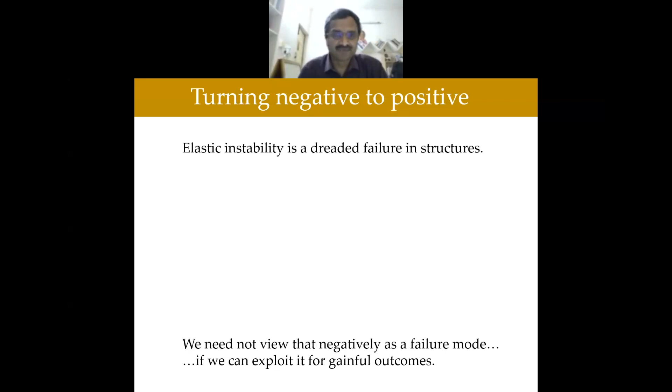Since it's evening, there's nothing wrong in remembering somebody like Charles Dickens, who said suffering has been stronger than all other teaching and has taught me to understand what your heart used to be. This is the quotation that is often used: I have been bent and broken, but I hope into a better shape. So that better shape is what I'm taking here.

In fact, we work on compliant mechanisms where Professor Steve Vogel, a very distinguished biologist who wrote about mechanical things—I'm sure many of you have read his books and papers—had his article written in 1995, just when I finished my PhD, called Better Bent Than Broken. That had a profound effect on how I started to look at mechanical design, where things can bend but do not break, and they bend into a shape that is actually useful. So its inspiration comes from Charles Dickens and Steve Vogel, and of course many other mechanical designers before me.

So buckling of columns is known to all of us. This is an instability. There's a little problem we always start with: just a rigid rod, not a flexible column, pivoted like an inverted pendulum, with a rotation spring of stiffness kappa. If you apply an axial load after a certain value, P critical, it will have a stable equilibrium that is off from theta equal to 0. One can derive the critical load very easily from looking at this equation and stability, and say that the critical load in this case will be kappa divided by L.

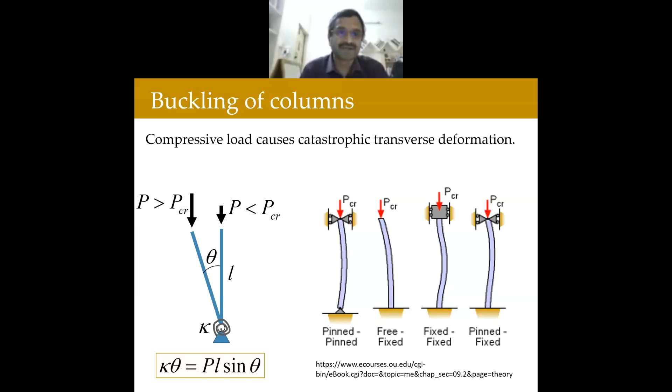That's a wonderful little problem to first look at instability. This is a very rich problem because we can illustrate the bifurcation. Theta equal to 0 will be the solution for a certain value of P critical, and then it bifurcates, and bifurcates, and bifurcates—it just goes on if you keep increasing the value of P. But we also learn that when you have a little bias right from the beginning, it will actually take a very nonlinear force-deflection path, P versus theta. So it's a very rich problem.

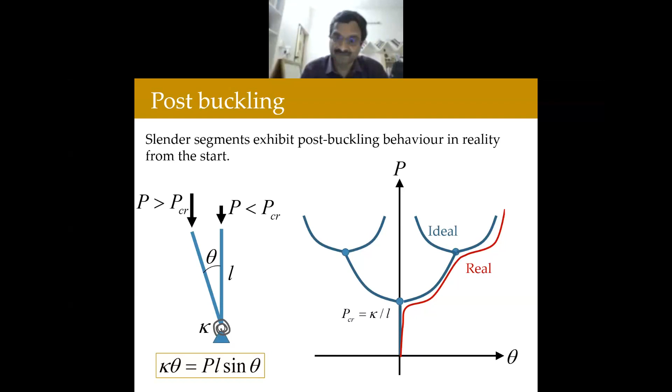Most of the time, we design structures to avoid this type of buckling. But today we are going to see how we can take advantage of this instability.

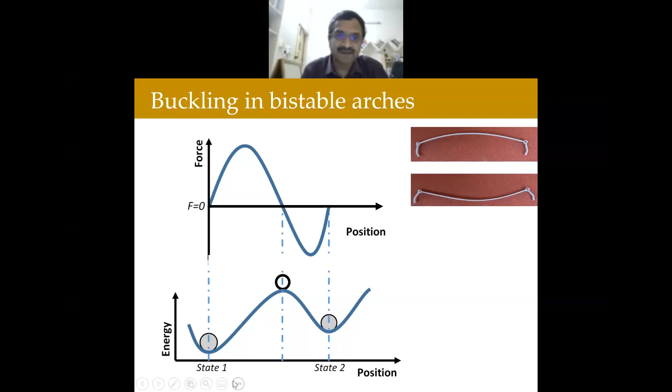Now the two stable states you can see for the pin-pinned shallow arch. And sometimes it can also snap through, that is, it won't be bistable, the force will never become negative, it will stay positive, but yet you get this nonlinear profile. The force goes to a maximum, comes down to a minimum, and then goes through, which we call snap through. And then, of course, bistability you already saw.

This can be thought of as a static response, force versus displacement, where you're holding it at different positions and asking what is the reaction force. That's what I have plotted. That region is negative stiffness, and that is actually the source of instability here. It just snaps to the other stable position.

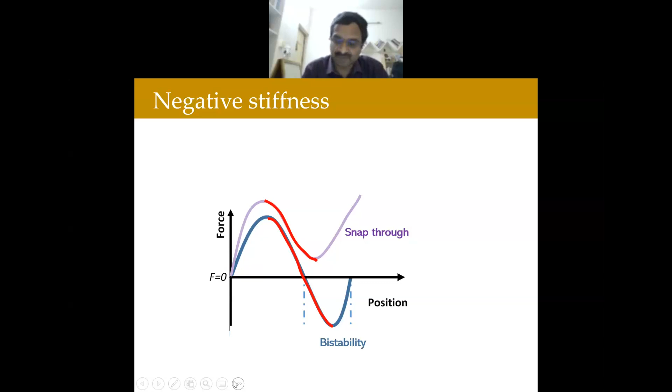But if you do it in a controlled way, you can actually get this negative stiffness zone, and that can be exploited, as we will see today. Some of you might have seen it earlier also. How do you use this, both this bistability as well as snap through?

We have been working on this for over a decade. Actually, I didn't realize that we were working on it for over a decade. And a number of applications have come through.

Some of them are shown here: a micromachined bistable switch, a circuit breaker that every house has, a therapeutic footwear, a chair for the elderly and people who suffer from arthritis and others, a valveless pump, a mechanical logic gate processor which is special to IIST, I'll come to that, and that is your institution. Also a compliant gripper that is kind of universal or versatile, and something that we do with biomechanics of cells.

But I'm not going to talk about that one. Whatever I put in black color, I'll talk about that. There's one in blue color, passive vibration isolator, that's actually not our work, it's a company called Minus K. Minus K itself tells you that K is stiffness, minus is negative stiffness.

A lot of applications can be thought of, and if I talk in detail about each of them, it'll be a talk in itself. So I'm going to give you an overview of this and how we are exploiting negative stiffness in all of these applications.

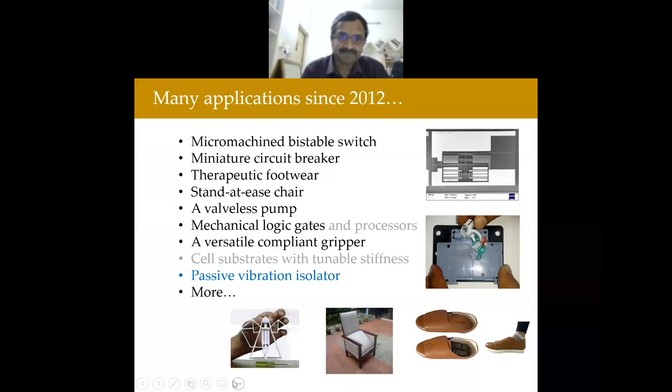So it all started with this click-clack tin lid. In fact, I have it here with me. I got it in 2002, actually 20 years ago, at a conference where they give some goodies with some candy in it. Somehow I liked the sound of it and the way it works. So I kept it with me, and then 10 years later I found a use all of a sudden, and then another 10 years we have worked on it. So the way it works, it's just a rusty metal tin.

If you press on it at the top, the concave surface, the convex surface becomes concave, and it opens this lid. They go outwards radially, and then when you press on those from the side, it actually flaps back, and then it makes the sound click, click, click, clack.

So it's bistable, in fact bimodal, that is, you can do it in two different ways, where there are two pathways to switch between two stable positions. It was intriguing for us, and then we tried to model it. So if you look at the same force versus displacement curve I talked about, if a shell is convex up like this, that's where you are.

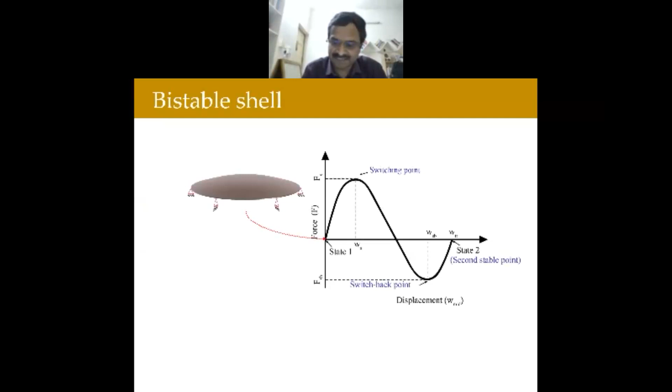At maximum, if you press on it from zero, you go to the maximum, then it switches to negative stiffness and comes to the other stable position where there is no force again. It's force free, and goes to the other state.

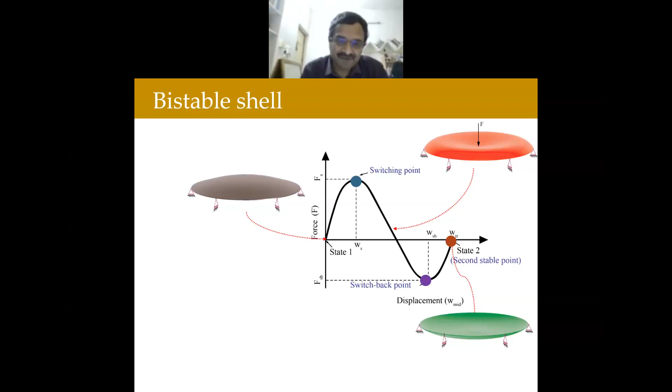So the shell is what we try to model. It was quite interesting when we tried to model it. I was playing with this rusty thing for a long time, and a parent of one of my students found one elsewhere and gave me a nice looking tin. There are people who make these just to give as gifts - I got one at a conference 20 years ago.

So we took this shell and were analyzing it. There were some interesting things. Then we thought we really want to analyze it well, analytically. Instead of doing it computationally, we took a section of it, and that became the shallow arch I'm talking about. It's pinned - that condition is important for this to work, because it actually rotates around the periphery of the shell. So when we took a section of it, it became a shallow arch.

So I'm showing the first equilibrium state, which is stress-free, just pinned at two ends. When we apply the force, it goes to the other state - that's a second equilibrium, no force, but it's stressed. That's also a stable equilibrium, as you saw. If I were to rotate that half of it about the pin joint, the shape will be different, as shown here, because the shape is deformed and has stress in it.

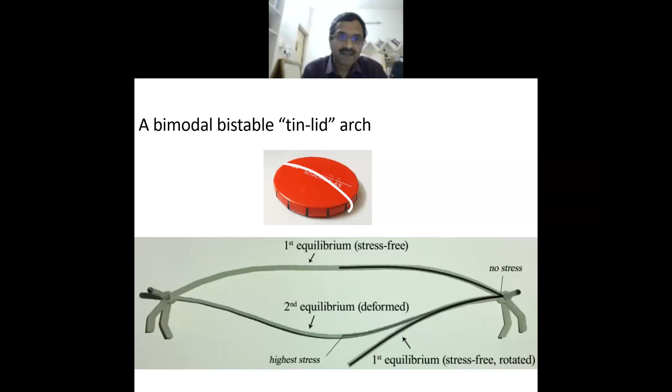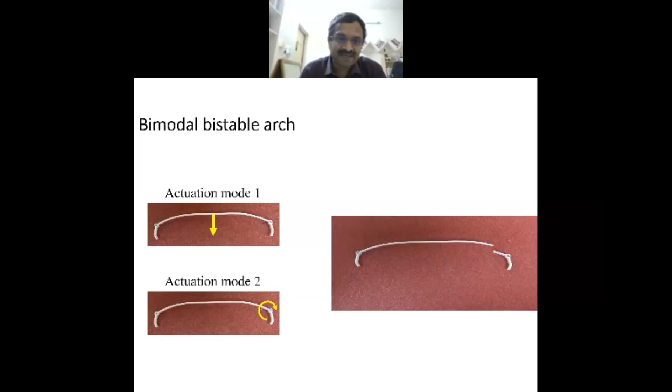So here I'm again showing that actuation. There are two ways of actuating this shallow arch. One is at the center, which switches it from state 1 to state 2. The second is applying torque at the pin joints to switch it from state 2 to state 1. There are two actuation modes - that's interesting - and you can see how we actually switch here in this video.

I hope the videos are playing well. So here we are actually actuating by applying torque rather than applying force. There are actually umpteen ways you can do it - I'm just talking about two ways of doing it.

And here also, if you start applying the torque, at some point your thumb that is holding it will lose contact - it just goes by itself. It happens very quickly, which is why I have to do high-speed video and slow it down with markers to show what's happening.

If you look at this from the energy viewpoint, we can look at the potential energy I showed earlier. The moment we apply some force, you add to the strain energy also the work potential, and the energy landscape changes. That's what I'm showing here.

Potential energy without the force work is just strain energy. When you apply port 1, applying the force at the center, it has one kind of curve - the dotted line here. When you apply the torque at the hinges, it's a dashed line. As we do this, it switches and the energy landscape changes.

We can see it - I will show some simulations later with time showing how they would look. This click-clack tin-lid actually takes a very tortuous path, as I'm showing: A to C, then C to B, and B to D, and D to A. That's interesting, and one can play with this in many other ways and use it in different applications.

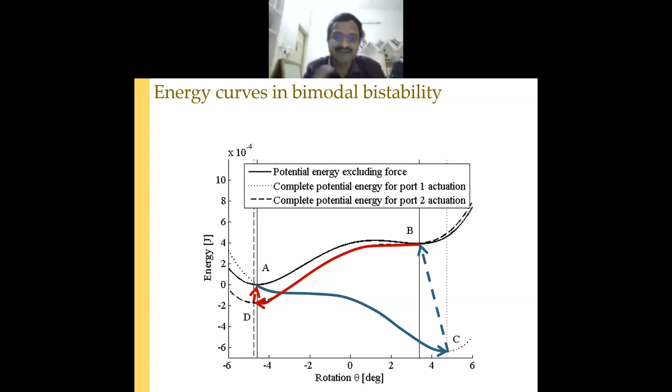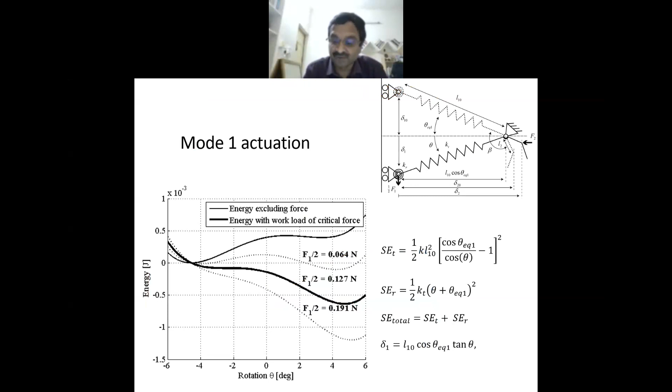We first modeled it using just a rotation spring and translation spring, trying to understand it with simple algebra - how we can get the critical forces required to switch it from state 1 to state 2, and also from state 2 to state 1. So it's all simple analytical algebra, I think, just to understand it.

This video will show you how the energy landscape changes as you watch force versus displacement, and how the energy curve changes with time as I'm applying the force - that force changing with the displacement. There's a midpoint displacement of the arch, U mid, and you can see how it goes and settles at the other stable state.

While coming back, because it is stressed, it requires much less force compared to the force required to switch it from state 1 to state 2. State 2 to state 1 needs very little force. The energy curve also has a local minima as the ball is moving, but that is very little compared to the previous one - that's a slope where the force is much less. You can switch with much less force from state 2 to state 1. So it was interesting.

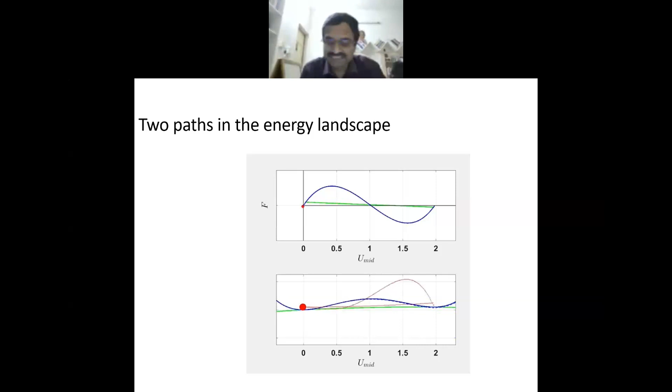It was a curiosity exercise about this click-clack lid. But then we thought, can we use it somewhere? And that's when we started on this project of making an assistive chair.

So if you imagine that arch I showed you, when the person sits on it, the convex-up arch can become concave-down, just like we saw. Then if the person wants to rise from the chair, they can press on the armrest. That is like applying torque at the joints. Then it will go to the other state, giving a push for the person to get out of the chair.

Of course, because the other state is also stable, while you are sitting in it, you don't feel any push. It will be comfortable like a regular chair. When you press on the armrest, it will propel you up.

Of course, we don't want the person to go like a projectile because this is an unstable phenomenon. If it just goes like that, it will be a problem. So we started combining this with static balancing so that it will be slow and gradual, so the person using this chair wouldn't feel sudden motion from sit to stand and stand to sit, both ways.

So we had this finite element analysis just to see how we can use this two-port actuation: while sitting, it's stable, so you are comfortable, it's not pushing you. When you want to get up, you press something, give a trigger, and that pushes you. But then static balancing combined could do this.

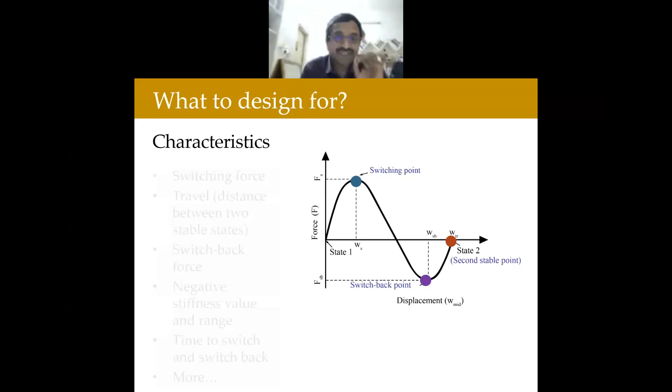So when you started thinking about it, the design came up. How do you design these bistable arches for this application? We looked at this force-displacement curve and thought, okay, there are switching points - a first switching point and switchback point we need to have. Then the switching forces, for shifting from state 1 to state 2 and then back, and how much travel there will be. And what is the range of displacement where you have negative stiffness, because that we really need to tune.

Also, time to switch from state 1 to state 2 and state 2 to state 1. All of this we wanted analytically, because doing it computationally is an unstable phenomenon. If you use finite element analysis for the shells or arches, it takes considerable time, and any design change you make will be problematic. So we started looking at it analytically.

So I'll just go over the analytical modeling quickly. When you start looking at it, you trace it back to the real stalwarts - in this case, Professor Y.C. Fung, the father figure of the biomechanics field. It was probably his doctoral work, a wonderful piece of work at Caltech, where he looked at these shallow arches and how to model them.

At the same time, at the Office of Naval Research, other people - Hoff and Bruce - had also done similar work. In fact, they acknowledged that, just before they published, Professor Fung and Kaplan had already done this too. So it's a coincidence, 1951 is when they did this work, and that's what people still use today. Their technique was very elegant and very simple.

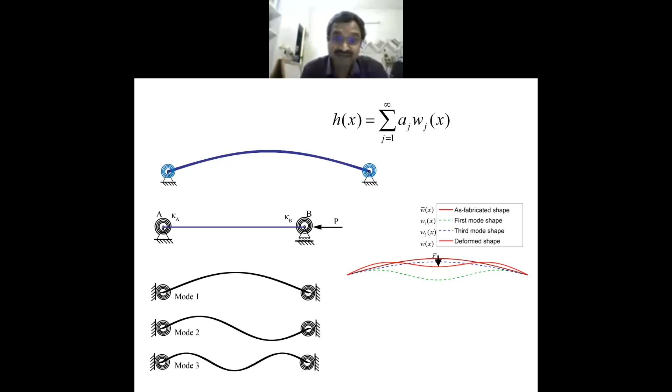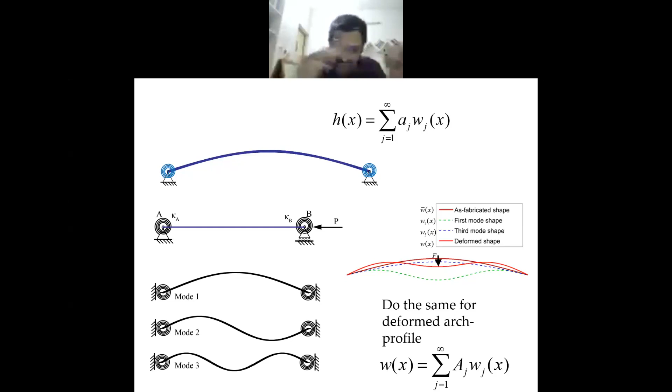And they did the same thing for the displacement, where the arch deforms - deformation of that arch, W of x, they expressed as small aj, from 1 to infinity. You can take as many modes as you want to model the arch itself. The displacement or deformation of this arch in the transverse direction will be capital AJ.

That's what they took, and it was very clever, because depending on your need, you can take the first 2 modes, first 3 modes, 1 mode, 2 modes, whatever. It turned a continuous problem into a discrete one - that always happens in the modal method we all know about. The other thing is that all these mode shapes can be worked out easily for any boundary condition, pinned, fixed, or whatever. Once you have these mode shapes, you'll know for a given profile what is a small a.

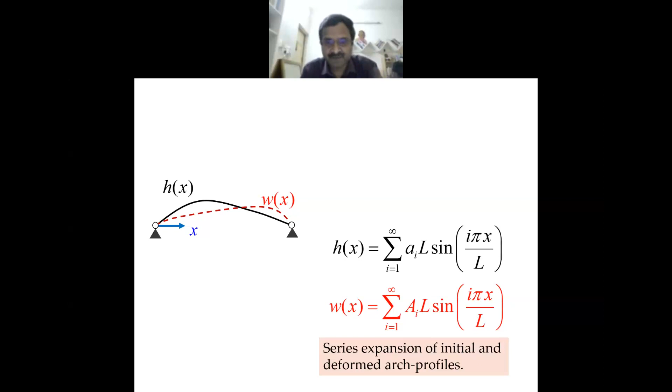That is small a1, a2, a3, whatever you have, you can get the shape. And you can make the higher ones zero also, depending on what shape you want to have for the arch. And then, of course, deformation you have to compute, which is W of x.

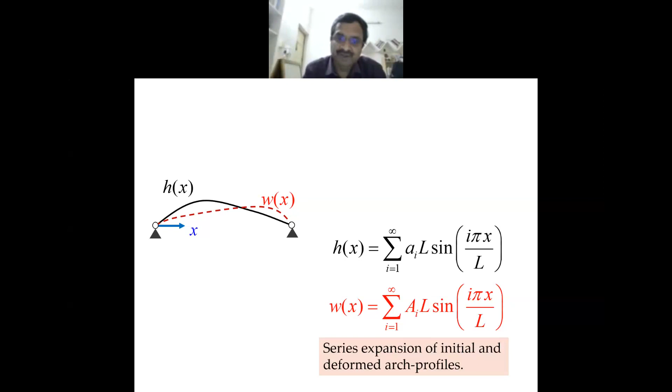And here is where the genius of that paper, those two papers, came through. Instead of solving this differential equation, which is quite difficult to solve analytically, they use the energy method. They minimize the potential energy by writing the bending energy and also axial compression energy. Bending energy is easy because we learn it at the undergraduate level. Axial compression energy is more difficult, but they had a very clever trick.

All they did was they took the axial stiffness and the change in length of this arch, because as the arch deforms when you apply the force, the arc length of the arch will change. They just took that original length and the final length, the change in length, multiplied by stiffness, an average one.

It works wonderfully. It actually gives results that are very accurate compared with finite element analysis. And why it works, we still don't know, but it works wonderfully. And that's what they had done.

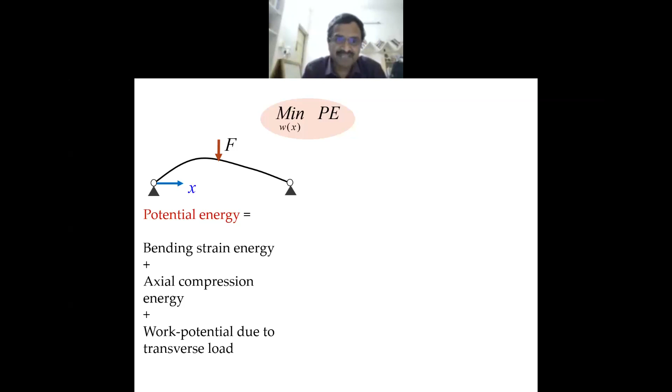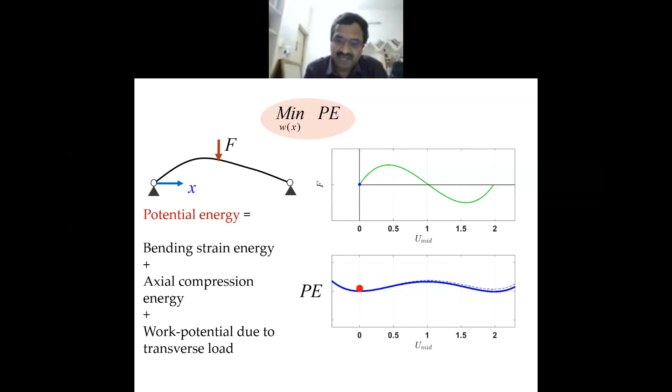And you take this potential energy approach, and now it becomes easy to do optimization. Basically, your W has capital A1, A2, A3, which are the mode weights of all these different buckling mode shapes, and you can determine them analytically very easily. And that's what we are doing here.

And then you have boundary conditions also added, and you can take the strain energy and the work potential, and the compression and bending as compression. You can write all these things in terms of W, but W is not a continuous function now because we have mode weights, right? So that becomes very easy.

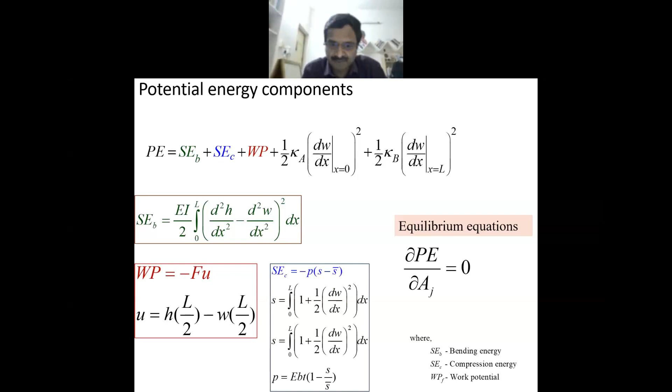You get equilibrium equations. It depends on how many modes you take for W, and you get so many equilibrium equations, which you can solve very easily. Everything can be done analytically.

And this is what my former student, Dr. Safwan Palathingal, did, who is now faculty at IIT Hyderabad. It is his work that I'm presenting mostly today. And he came up with this analytical way of computing the critical points.

What are the red spots here? So that we can get it very easily for different boundary conditions and different numbers of mode shapes that we consider. And it's all analytical.

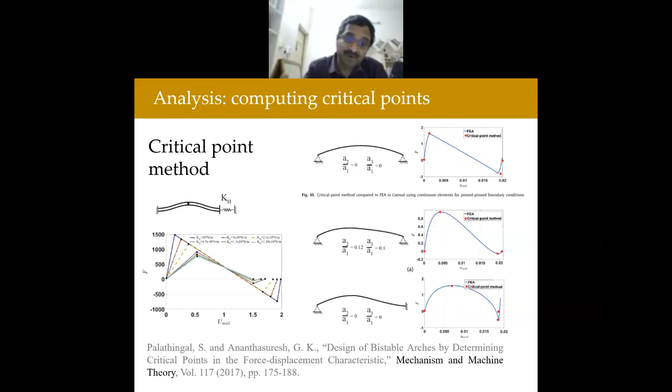We can derive formulae for these things. We don't do finite element analysis. We can change the boundary condition by putting a spring and so forth. So it's all analytical and quite straightforward, once you learn from the masters.

And then we also found out that instead of letting this arch deform in a plane like I showed, if you let it go spatially, spatial pathways, you also introduce twisting, because we saw that in reality the force required for the spatial pathway, the switching force, is less than that of the planar pathway. So what you see, the planar deformation, the green curve, has a higher switching force than the spatial pathway.

In reality, when you have a structure, it always takes the path of least resistance, right? So it actually deforms also, like twists. It's interesting, so here we could also include the twisting energy.

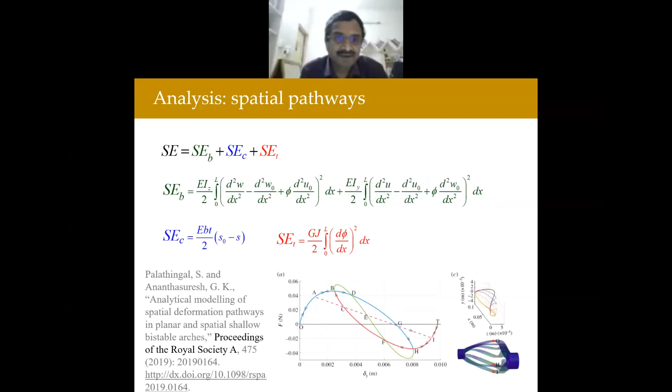Interestingly, this analysis was done by Saint Venant and Mitchell. It was in the Theory of Elasticity by Love, which is a classical treatise on elasticity. They had not included the twisting energy. We put that term in — Safwan added that term to the strain energy. They were able to do the spatial buckling also, analytically.

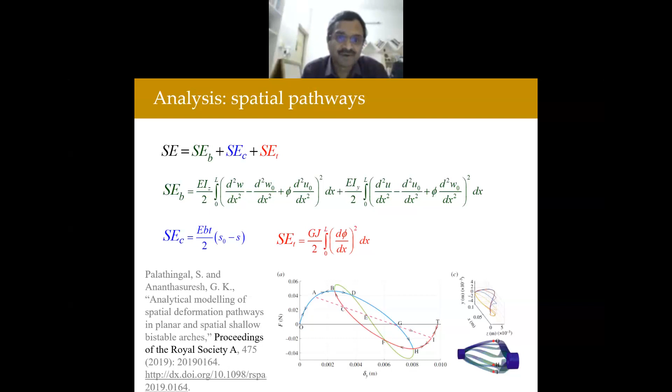We started becoming more and more courageous to look at these things. Then we started looking at synthesis — how do you come back? That is, if you want certain bistable behavior, let's say if you have that h of x, which is the undeformed arch, and the deformed arch is h plus w, where w is the deformation, then you have two stable states. How do you relate them analytically?

It was possible because of the method I just described. So if we are given this small aj's, however many you have to define your shape, from those you can actually get capital Aj's and go back and forth. It was all done analytically.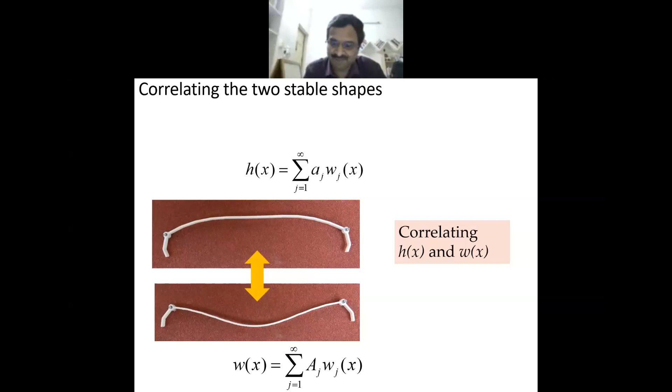So those are the equations I'm showing — a lot of algebra, I'm skipping all of that. So if you are given the stress-free state, that is the ai's, many of them can be zero. You may have only one or two or three, a5, a7, whichever, to our need and taste. And then it was reduced to a single nonlinear equation in A1.

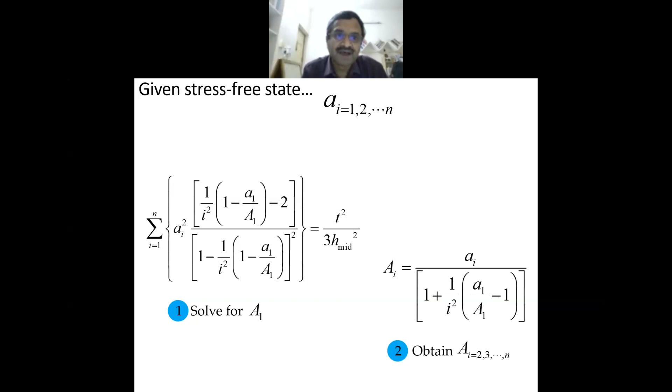Capital A1 is the deformed shape, and once you have that, everything else we calculate analytically using simple formulae that Safwan was able to obtain. Also, the other way, if we are given the stressed state, you can get the stress-free state. That is basically for design—these formulae become very handy, so you can actually design the undeformed state of the arch for a desired deformed state. That's what you want, and you can get that using this formula.

So we started doing all kinds of shapes. You could specify—since it's analytical and very easy, only one nonlinear equation in one variable—we could do that very easily.

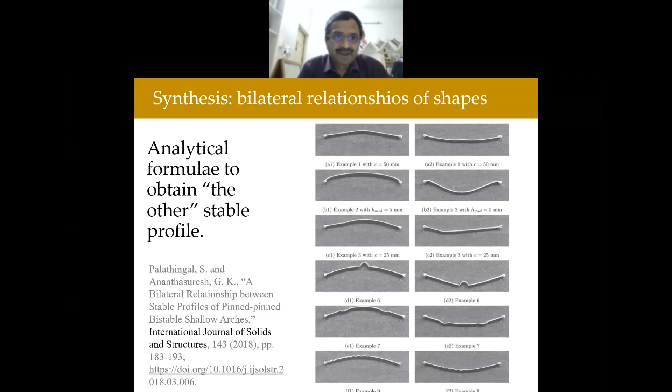So with that analytical design for different boundary conditions, for example, if you want to make a valve—no, not a valveless pump I'm talking about, just a valve—that is a shape that you want in the stressed state, the other stable state, not the one they are making. So how do you get the first one? We could get it from this analytical formula.

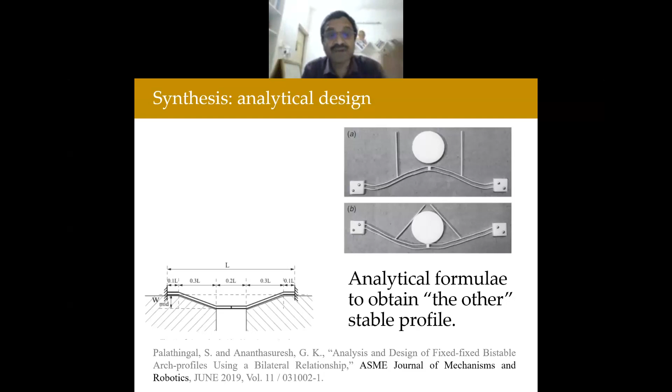The red one that I'm showing—if you apply the force, it actually becomes almost like this, which is shown here. If you put two arms like that, you can also grasp something. So by looking at these, we started getting a lot of ideas for applications.

I'm looking at the clock also, so I'm going to show a lot of applications now so that we can end the talk. I'm going to go fast.

Now that I've described the concept and the analysis and synthesis equations—micromachined switches. This was funded by ISRO, with a number of students, including Giridhar, a scientist at ISRO. This is the bistable switch.

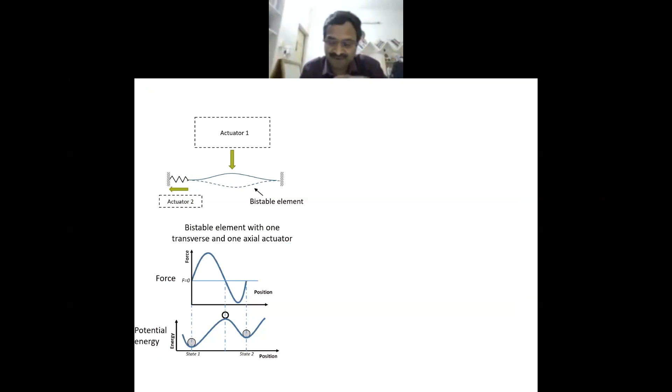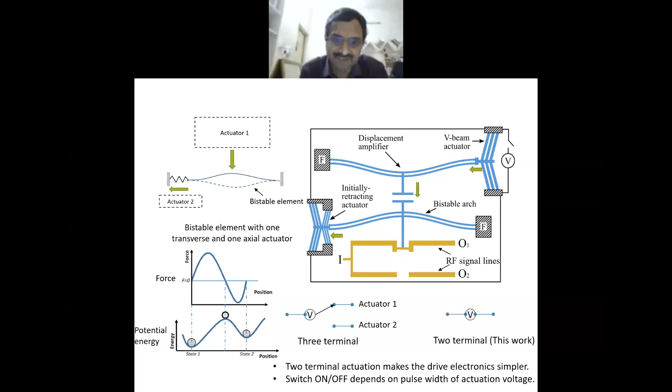We made that switch using this negative stiffness and these arches, several of them. I'll illustrate the principle of how this works with a little first graphic animation, and then I'll show the real device also. So now the current is going from I to O1, and then when I apply this electrothermal actuator, which is shown where I'm applying voltage, it will switch.

I'm just showing the intermediate state. It will switch there to the other state. And then when I apply the same voltage at the same two terminals—now you see I don't need to apply the voltage continuously. I only need energy to switch from state 1 to state 2; in between, I don't have to. That's why these are electric switches—we all know the principle.

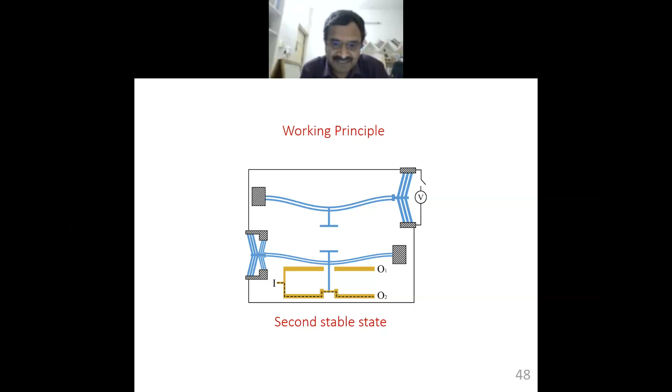In this particular case, to switch an antenna, they wanted a number of switches. They don't want to use energy all the time—just switching uses energy, that's why they were interested. We pursued this application, apply the voltage, and for this we had to design a special actuator at the other end so that it actually switches back. So that's how it is.

I'll show the video now. Video will start playing—you see, it's a micromachined version. The beams here are 5 microns wide, and a thermal actuator is on the left side as well as the right side. There's a particular reason why you need two actuators here, because we want to control the instability of it, since it's all negative stiffness in between. So we were able to make it, and it's a switch. My student Dhananjay put his imprint also, DJ, there.

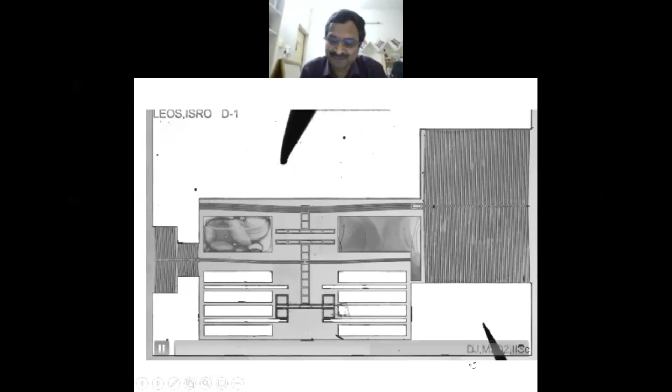So next, miniature circuit breakers. They're wonderful devices, but they have many parts. Every house has this now, MCBs as they are called, and they have a lot of parts. So when we were talking with Eaton Company, we said we can do it with fewer parts—actually 1 or 2 parts we promised them and did it. So that's how the MCB looks.

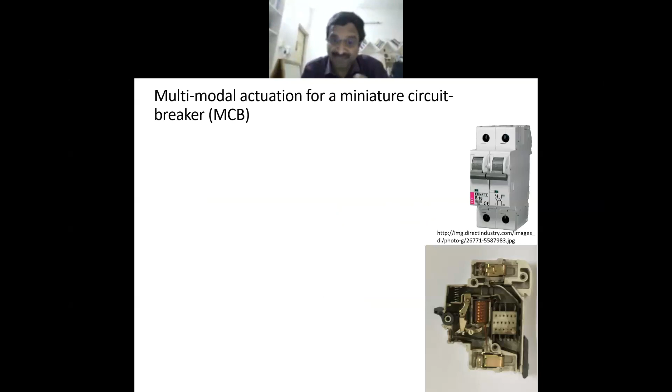It's a switch, but it has a lot of functionality—it's quite an interesting device. You can do manual closing and opening if you want. It can trip when there is a fault in the line, or if it gets too hot, it can also trip. Also, we should be able to relatch—whenever a trip happens, we know it becomes loose, so you have to push it back and bring it down. All of it is mechanical, right? It's a wonderful device, but a lot of parts, as you can see.

We started doing that with one part we had designed, but when you actually go to industry and give them, they say it's difficult to make, or they have to change lots of things. So we gave them 2 parts instead.

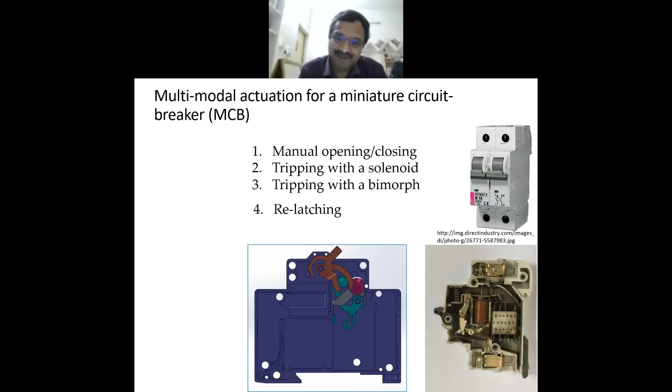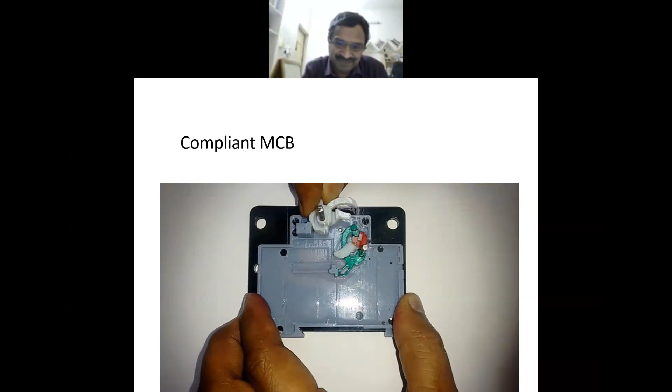So I'll show this device. It's a prototype, real size of this. We could get all those functionalities. You cannot see the negative stiffness here, it's hard, but with the details you would be able to see. And this is another model.

Instead of MCB, they had also MCCB, this is molded case circuit breaker, a little bit more. If you notice this video, after you do the actuation, I'll play it again. After actuation, it waits for a while and then the switch goes. It's like a delay, you can get delays in mechanical systems. This is one of those examples.

So here we made a one-piece design of a snap action device. I hope the video is playing for you. After you move the switch, which is what you're doing in MCB, it waits for a while and then holds all the energy and suddenly goes and snaps, so that it makes a very good electrical contact there. So that's how we achieved it, and this is a 3D view of that device.

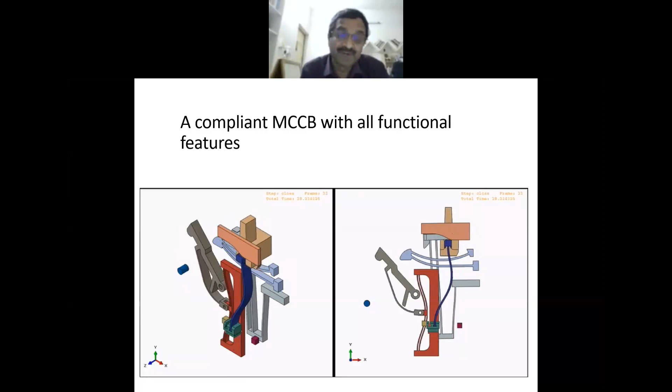We just put the MCCB switch. It's all barring 1 or 2 hinges there, everything else is compliant, and a lot of arches are there with these negative stiffness elements. There's a lot of detail, but I've already given you the idea of how we are doing analytical as well as synthetic modeling. Now, this is another application.

This is footwear. We were just talking with a podiatrist, and they were talking about offloading. They always work with some memory foam or other polymer material, which can be carved and shaped to suit the foot needs, where ulceration occurs or not. But then the doctor told us that after they use it for a few months, sometimes even few days, their gait changes and some other portion that is not offloaded becomes vulnerable.

This was done with support from Rajiv Gandhi University Health Sciences, with Dr. Pawan Velahalli and my students Priyabrat Maharana and Jyoti Panavane. Normally you see static offloading, as it's called, where you basically carve out the foam-like material, but that only offloads that region for that time. When you change it, it will be a problem.

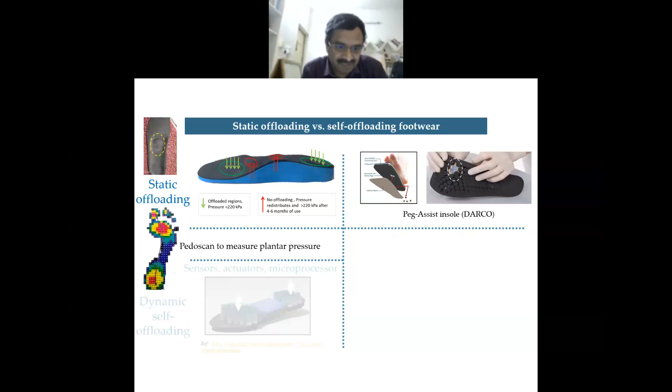Somebody came up with an electromechanical device where there are little pegs that move up and down. There are sensors, and they go down and offload, like I'm showing in the lower left half of the screen now, the dynamic offloading. We thought, can we not do that with entirely mechanical means using these arches, as I'm showing here? And the next video will also illustrate the thing.

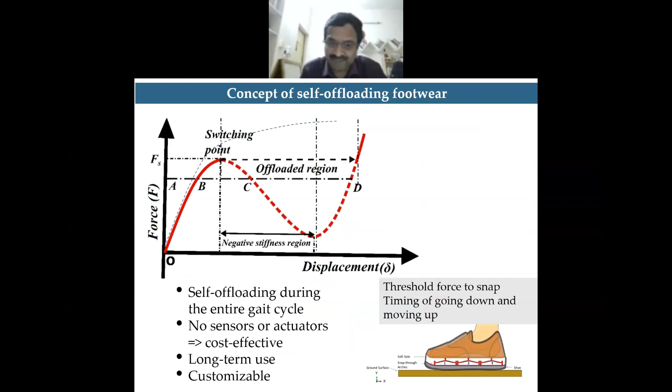Again, we work with these arches, designed in an array of them, as you would see in this video. I hope again the video is playing for you. There are these snap through arches now, they just go down and offload at a pre-threshold, 220 kilopascal.

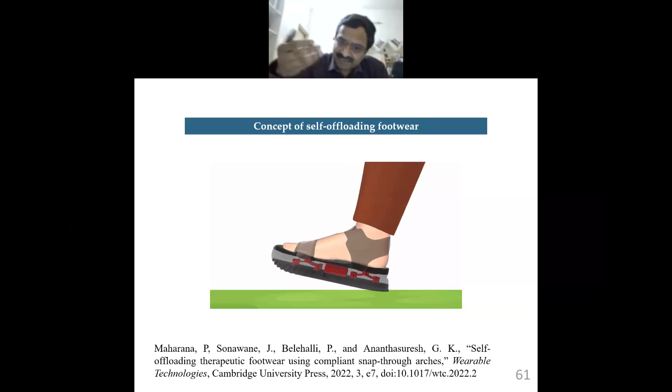They use Pascal units for this podiatry. If it exceeds that, the arches will move down automatically. They snap, and then the load goes to another portion, and then we redistribute the plantar pressure. And then nowhere on the foot will the pressure be more than what the doctor prescribes.

And it can be customized to each individual, because we can make these arches, an array of arches throughout different regions of the sole of the foot, and different phases of gait - heel strike, flat foot, mid stance, heel off, all of those things. Normal footwear will have problems.

The red spots are high stress. With static offloading, somewhere they offload it, but in other places, in the gait phases, different phases of the gait cycle, pressure will again increase. Whereas ours can be designed so that nowhere is the pressure more than 200 kilopascal.

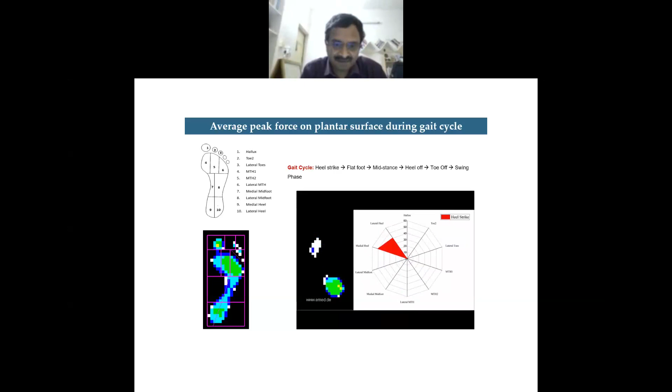That's what we did. We did the tests in the lab with these measurements at the Karnataka Institute of Endocrinology in Bangalore, measured with about 100 people, and then arrived at the values so that we could design our arches, with some statistical analysis also. I'm not going into details in this talk, I'm giving an overview. This is how it looks.

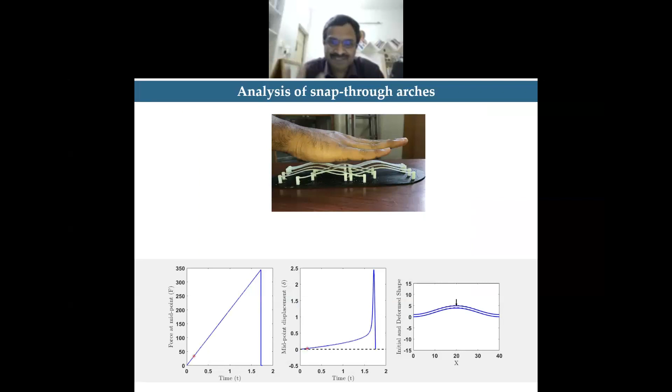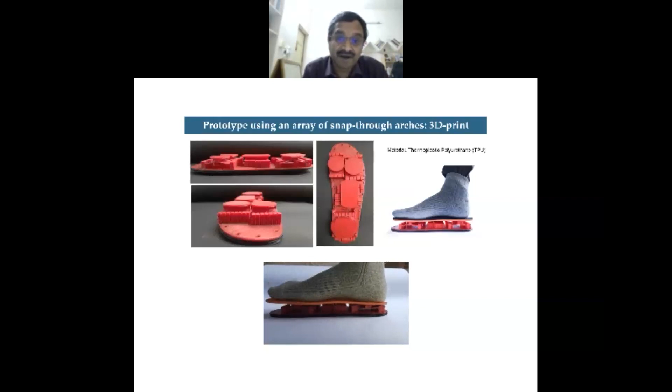This is the hand, my student Priyabrat is doing, showing how it offloads. And today we have the footwear that looks like this, where you can step on it. It's all 3D printed, customized for each individual. Polyurethane seems to be a very strong material, so we're not worried about it breaking. This footwear can now be worn, and we can put sensors to measure pressure also, but we know that they snap at the prescribed or bespoke value.

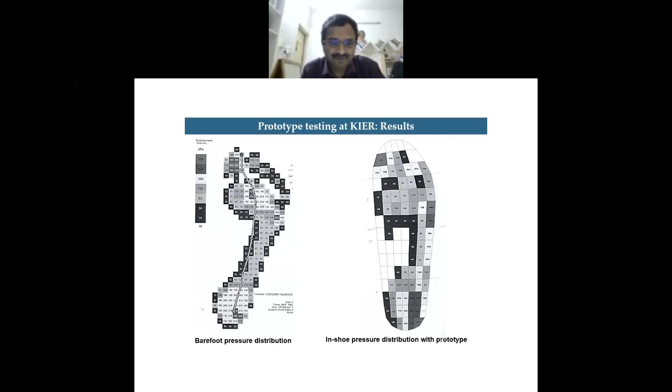And we found that with this footwear, 34% reduction can be obtained on average in the entire gait cycle. You can walk, run, nowhere will it be more than that 200 kilopascal that you would get otherwise.

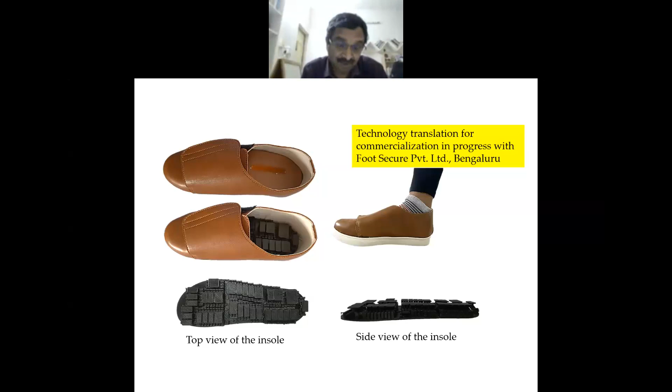And we started with the assistive chair. I'll go with that application very quickly. This actually went on for a long time. Now we have a startup company, and we talked to geriatricians, took their inputs 10 years ago. They're still involved with us. Several of my colleagues and several generations of students worked on it.

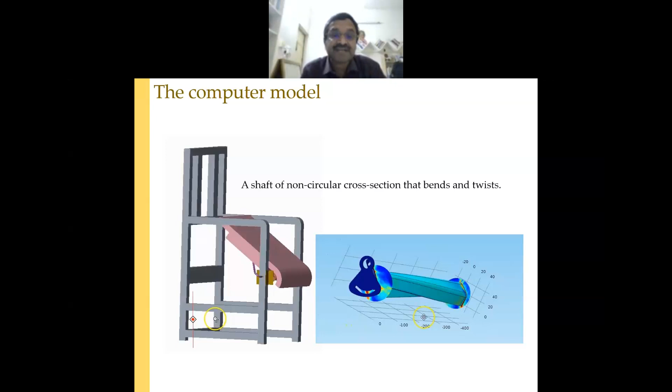It's a very simple thing. The chair seat is at an angle, and there is a rotation. With our ability to handle shells as well as arches, and twisting, bending, axial stiffnesses or energies, we're able to design a chair like that, which looks like as if you put a pillow. Some industrial design students did that. If you sit, it'll give you supportive force while you sit, so that you don't need to slouch into the chair, which normally senior adults tend to do.

When you want to get up, while you're sitting, you don't feel anything—it's like a normal chair. When you want to get up, unlike what you'd normally need to press, now we don't have to do it. It itself will push you gently when you show the intent to rise. So a lot of work has gone into this, and this became like a hinge mechanism, we call it, using open section shells.

The easiest way is to show you the video. So it's a compliant one—there are no bearings. It's just the whole structure flexing, twisting, and bending. Open section shells are analytically very difficult to do, but my students worked hard and came up with interesting design methods that we could use to design these shells. And this is how it looks.

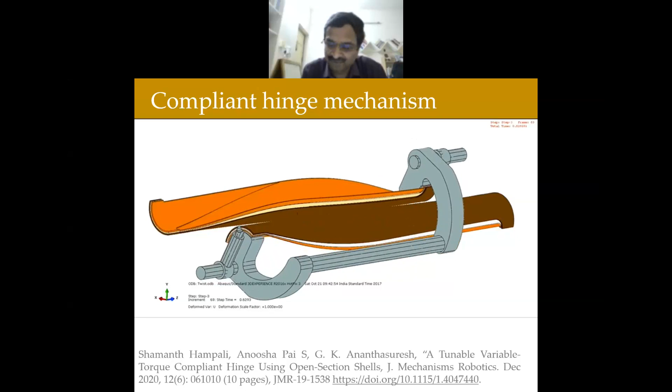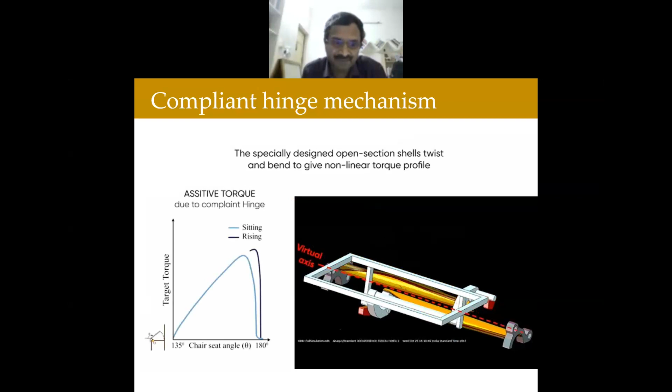I have a 2-minute video that will show how the torque will rise first and then decrease again—so negative stiffness there. That's when you go into the chair. While getting back, it follows a different path. We have done it analytically also, simple models first, and then finite element analysis as well. We have a nice design method with which you can choose the torque versus angle, which is like a bell-shaped curve, and for sitting in and rising, it's two different curves.

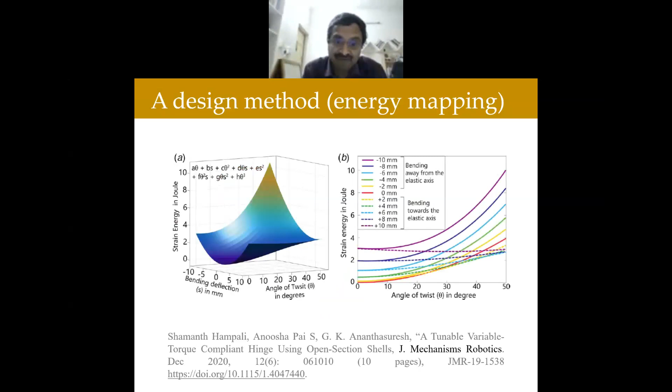And we do that with cams. I'll play this video—hope we are able to see it. I'll be done in a few minutes after showing some more applications.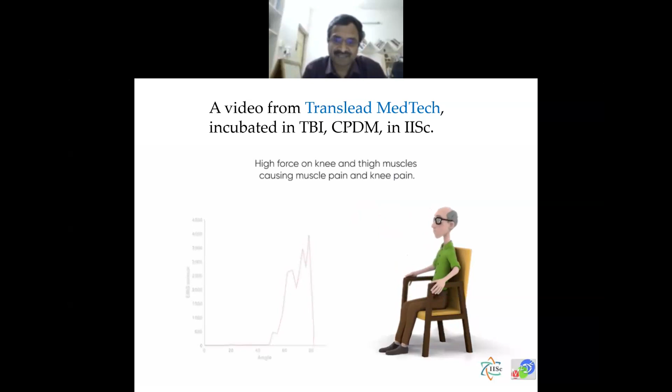Everybody knows that it's difficult to rise from a chair for people, especially older people. So we put first these EMG sensors to measure what is the knee torque—that's what you wanted to reduce. That's how it is when you don't have anything to assist. And when you get up, it'll be a different EMG value that you get.

But now with the chair that we have designed—everything is inside, of course. There's a patent and a number of papers. It looks like this, metal shells there. When you sit, torque versus angle shows a nonlinear negative region—nonlinear negative stiffness region. That's for sitting in; going up is different.

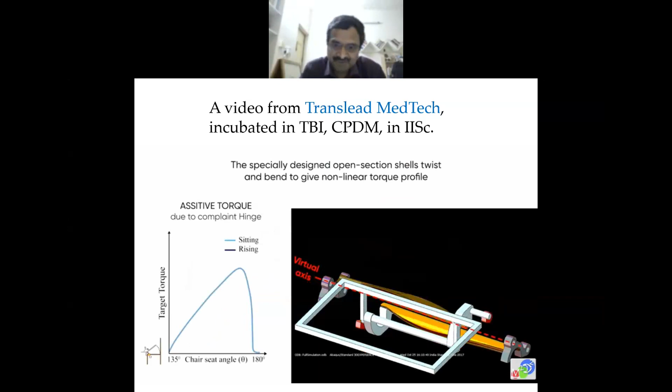Both ways the slopes are zero, meaning in neither case do you feel that push when you are sitting there. It's all one piece, compliant design, and the virtual axis—the hinge is a virtual axis—you don't need bearings there. Normal assistive chairs will have just a linear mechanism; most will keep pushing you when you sit, whereas here it doesn't do that. And it can be customized, as you will see in a minute. There are basically two cams—these are shells that twist and bend at the same time. That's what gives this nonlinearity that we designed.

The bending of the shell can be controlled with cams, small pieces that let us customize the curve for every individual based on their weight and height. These cams are classic mechanical design elements, and they can be changed in the mechanism to suit different weights, heights, and abilities.

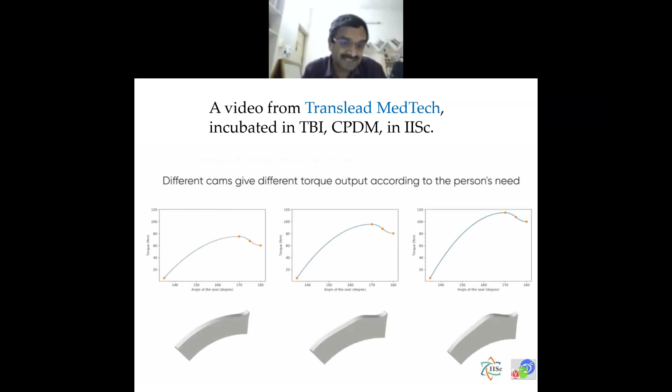My student is sitting in it because we needed ethical clearance to do that, which we now have, and we tested it. The cams moving over each other is the only kinematic pair here; everything else is compliant. I hope you got a feel for that.

I'll go through a few other applications quickly just to show how much can be done with this negative stiffness phenomenon. First, a valveless pump. In the interest of time, I'll just play this video, which will show you why it's called valveless.

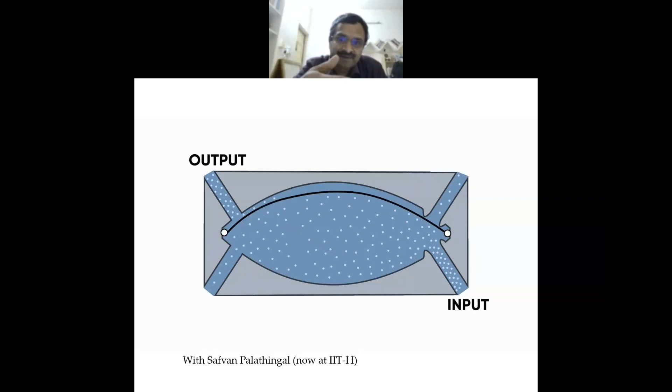We have the shell shown in cross section. The way it's made to deform asymmetrically closes the inlet and outlet in a cycle, with input and output marked. The shell itself closes the inlet or outlet valve, so we don't need any separate valves.

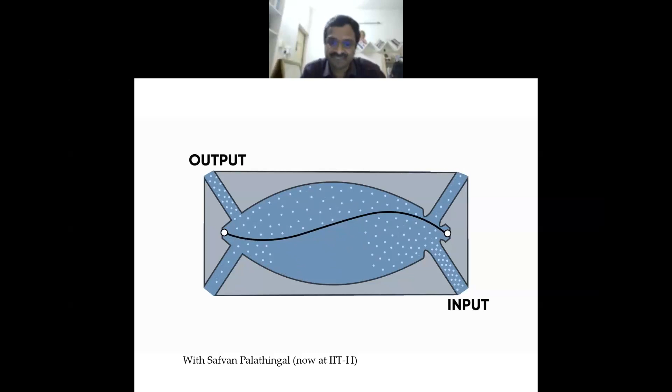It can run at very high speed, and a pump can be made this way. We're actually working on this with Toyota Corporation, since they wanted very compact pumps, almost as flat as the tin lid I showed earlier. The shell moves up and down, closing the inlet and outlet at different phases of the cycle, and both sides are used for pumping, with two inputs and two outputs that can each be connected. I hope you got the idea for the valveless pump.

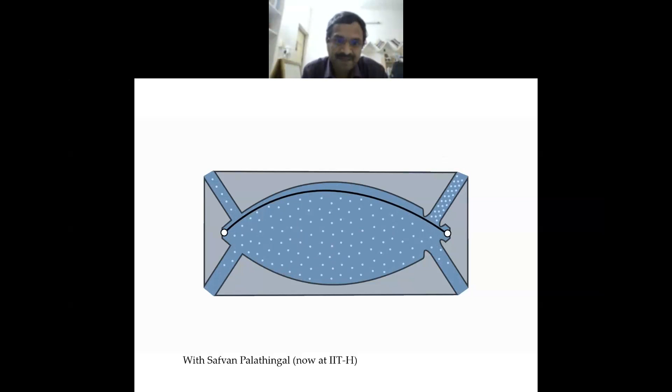Next, the mechanical logic gate. This is special for IIST because the work was done by one of your students. You have distinguished alumni and excellent students, like Deepa and Banik, and Professor Ghosh, who thought it would be nice to make mechanical OR gates using these arches. Deepa did this work at IIST, and this figure I'm showing is your own product. I won't play the video since it takes a while.

Later, during the pandemic, a summer intern made the AND gate, so we got bolder and are now building entire logic processors using these elements. Professor Ghosh had the foresight to suggest this. We also found that someone else had published a paper in a journal like Science describing miniaturized mechanical gates, which made us think, why didn't we do that? It's an interesting idea, so we're building entire logic processors using these negative stiffness elements.

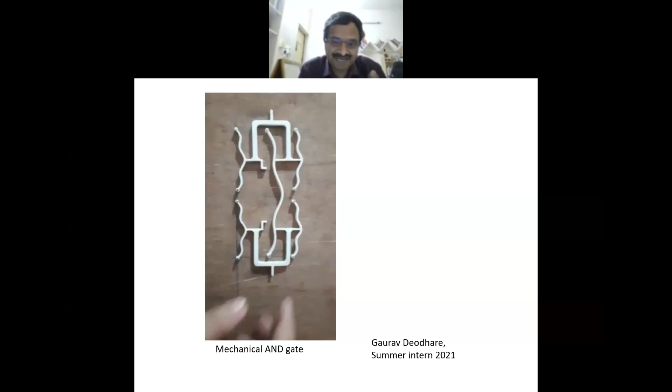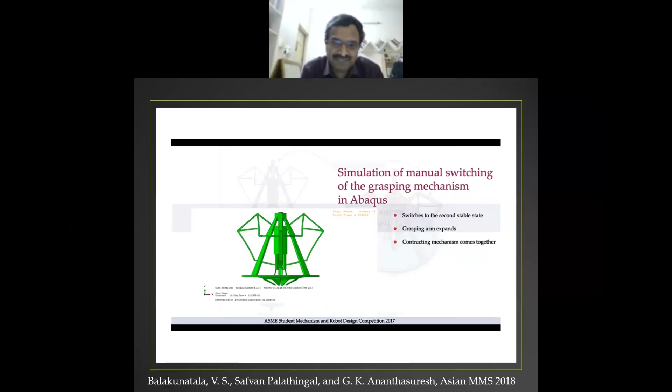It's an AND gate. Now the universal gripper—let me show the video. This uses a shell to grab things; it's a universal gripper where the shape of the object doesn't matter. The convex surface becomes concave, with a few arms attached, and if you press it onto an object, as you see in this video, you can pick up anything. There's no magnet, no vacuum—you can pick up an object of any shape.

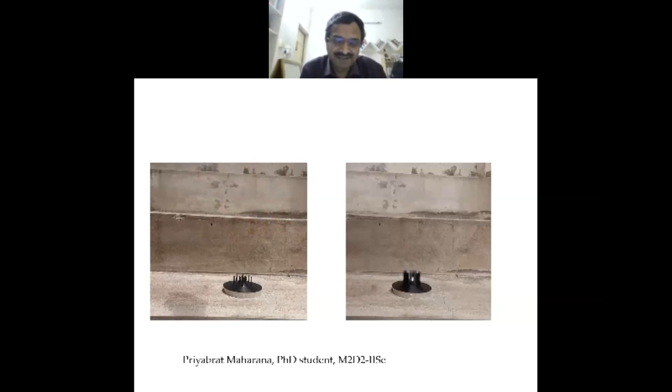A screwdriver is being picked up now. It's a compliant mechanism, so pressing it again releases the object. This universal gripper can also be used to catch objects that fall onto it—it everts the other way and captures them, shown here in high-speed video. There's an interesting application here that I'll leave to your imagination to pursue with this simple idea.

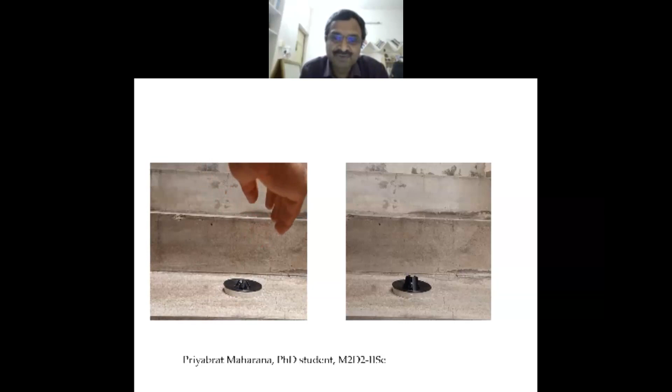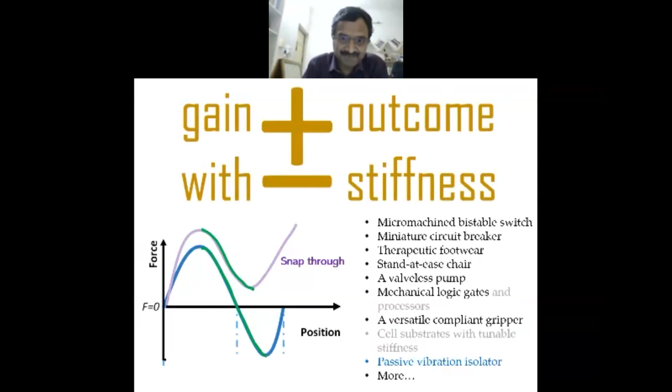I hope I've convinced you that there are a lot of gainful outcomes if you can exploit negative stiffness. I will end here, and if there are any questions, I'll be very happy to take them. Thank you.